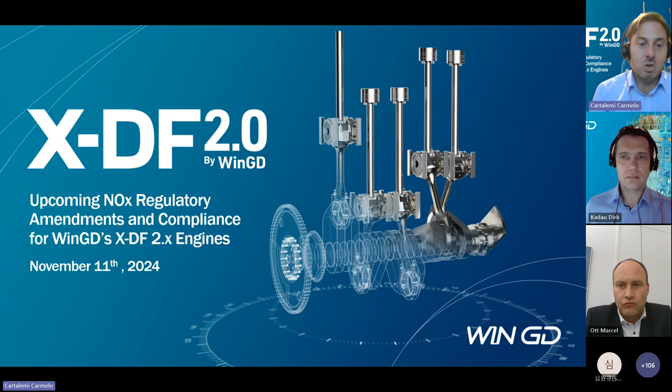A quick look at the agenda today. My name is Carmelo Cartalemi, I'm head of global sales, giving this introduction speech. Following me will be Dirk Kadau, our senior regulatory affairs expert, who will provide the overview of the revised NOx regulation. Then our Marcel Ott, general manager application engineering, will explain the iCER concept, the X-DF 2.0, what is unique about this technology, and show you our level of NOx emissions.

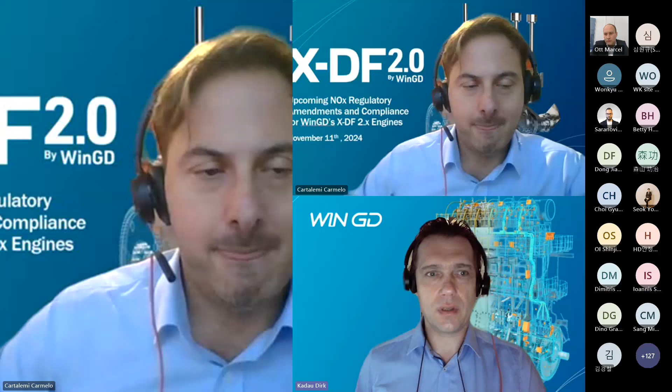Now I start sharing the presentation slides. So that should be the one, please complain if you cannot see them. These are my presentation slides. I will start giving you an overview about the revised regulation. So that is the brief overview of the contents.

I will start with a short overview and timeline of what was going on, then a summary of the main points of the regulation, then mentioning what is a rational versus an irrational emission control strategy, then introducing the concept of the not-to-exceed zone, and then the multi-engine operational profiles, ending with a short conclusion.

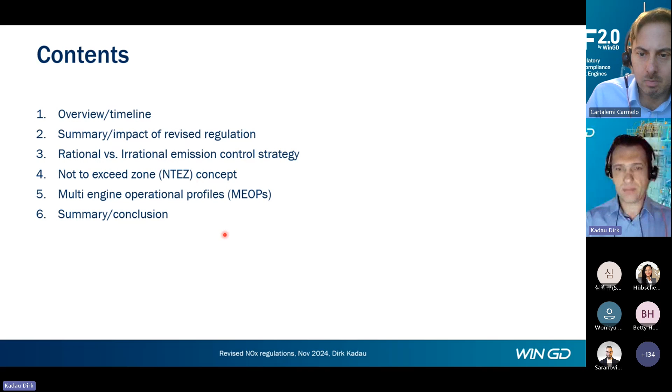That is an overview of what has happened in the past related to this topic. I will not go into detail on all aspects here, but mention only the main points. It started in 2016 with a submission by Norway related to multi-engine operational profiles, short MEOPs.

It was later extended to cover also the not-to-exceed zone concept. There were many discussions at IMO, mainly in the PPR subcommittee, and this ended with a common proposal by US, IMarEST, and Euromot, where all engine manufacturers and designers, as we are, participated as well.

That common agreement proposal was agreed at PPR in early 2024, and recently approved at MEPC. This was then released in an IMO circular where you can see all the details of the regulation. There are other additional information papers which I've listed here, in particular this webinar held in the context of PPR 11 by US, IMarEST and Euromot, which I will also use in my presentation with some illustrations from it.

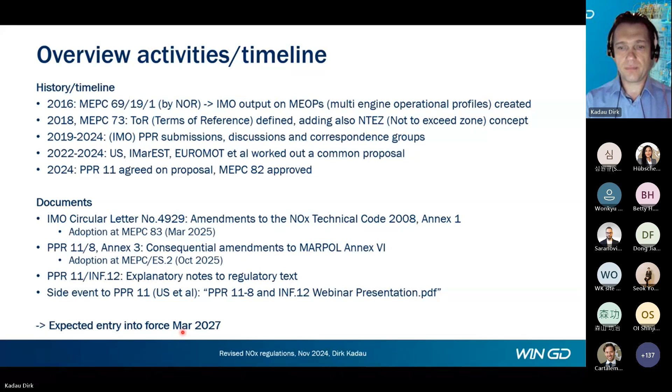And this will be entering into force in March 2027. So that is a brief summary of it.

First of all, I would like to highlight that these new requirements are rather clarifications of what is already considered to be existing regulations. So it will not change the stringency or lead to stricter rules than we have now. It's more a matter of clarification of existing rules, which you will see in the course of this presentation.

What will be added is some documentation effort, what is then called the NOx certification pack. There we will have to describe our base emission control strategy, then also the auxiliary control devices, which we already do now but will have to document in more detail, and there will be an extended definition of these ACDs such that we will have to declare additional ACDs. But that is what we are going to support, of course, our licensees and engine manufacturers in that regard.

What is important to note here is this discussion already in the existing regulation about a rational versus an irrational emission control strategy. You should have a rational emission control strategy, and you are not allowed to have a so-called irrational one. That applies already now, but it is not further specified in the current regulation what this means.

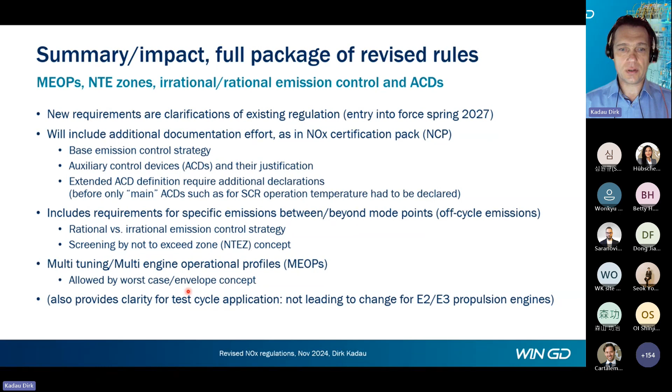In addition to that, there were also some modifications for test cycles, but these would not change the application for our engine categories. That is maybe the main point behind adding a more detailed screening option for the emission control strategy.

Here on the left, you can see an illustration of a rational emission control strategy. Just to mention, this illustration was specifically designed for a presentation by US and others, which was held for the IMO. Here you can see between the different four mode points, the speed and power plot, which is the one we all know is certified during a shop test, and in between or going beyond, it will react smoothly. That is what is called a rational emission control strategy.

Here, just to highlight again, that is not an existing engine, but just an illustration of how an irrational emission control strategy could look like. There would only be very low specific NOx emissions around the four mode points, and much higher emissions in the rest of the speed power plane. That would mean these four mode points would not be representative for the emission behavior of the engine. And that is not what it should be.

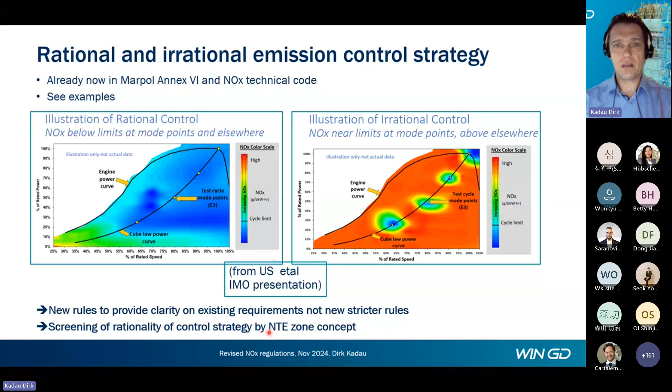What is important to know for this not to exceed zone is that it has to be specified. It will be specified by the applicant, typically the engine manufacturer, and of course supported by the engine designer in our case. It should cover all the steady state operation points within this zone.

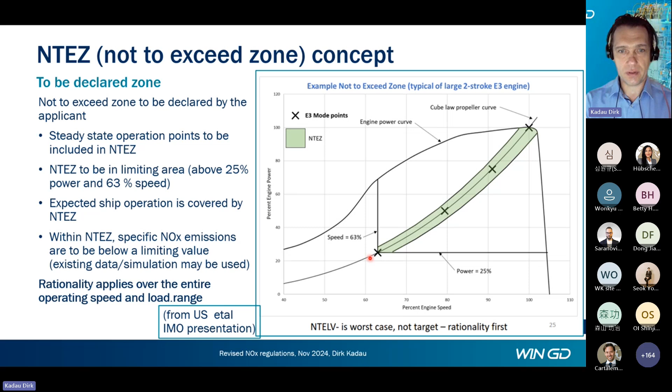What is maybe most important is now the criteria, the limiting values in there, and I will try to make this as short as possible. So on the mode line, you would apply a factor of 1.2 to the values you measured. And for tier 3, you would add 25% of the limit value to the value you measured on the mode line.

So that would be, in our case, 25% of 3.4 gram per kilowatt hour, meaning 0.85 gram per kilowatt hour. That would be on the mode line, which is illustrated here in this very thin line.

And then at the edge, that would be increased to a factor of 1.5, and you get an additional factor Fb, which accounts for the amount you are below the limit value, your cycle average below the limit value.

So assume for tier 3 you only have 1.7 gram per kilowatt hour, which is only half of the limiting value. That would grant you a factor of 2 here in addition to this 1.5. That is also illustrated here.

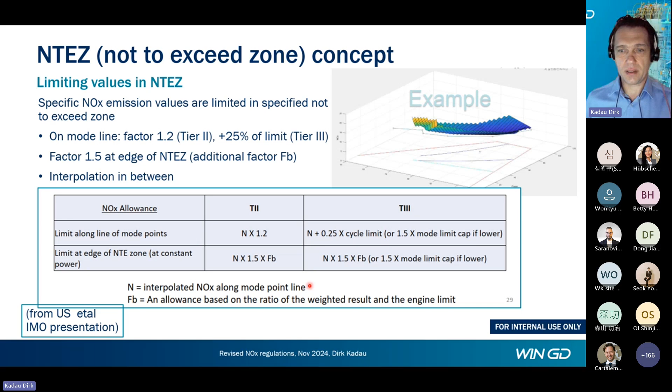And here, again, that is a summary of that one. Here, that is a bit more detail on how you would determine these values. So that is again the speed and power line.

Here you would have the mode points, and to determine the limiting value for this point, you would first have to interpolate your emission value measured at these two mode points. You would receive the value here, this N, what is called Ny.

That you would then multiply by the factor 1.2, or the other criterion for tier 3 accordingly, which gives you this NLY. That would be at this point the limiting value, and then you would have a limiting value specified by 1.5 times the value, which gives you the value here, and then you would interpolate between those two points.

And that would be then the limiting value at your checkpoint, which you would have to cope with.

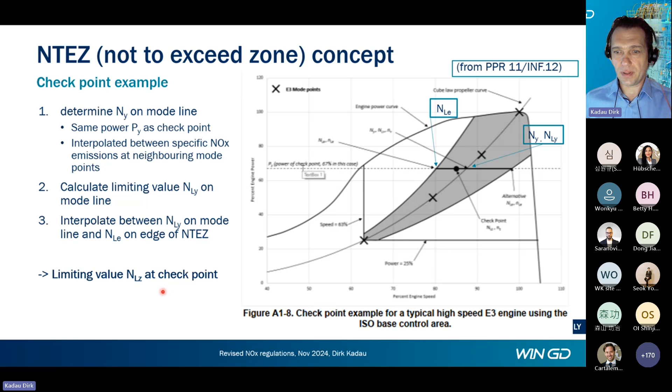In the new regulation, it is clearly regulated that you have to take the highest value of each, due to the reason that the operator can switch freely between these modes. In principle, if this were specified differently, he could use switching between the modes to circumvent being in line with the requirements of the NOx emission regulation. That is the reason why this is like this.

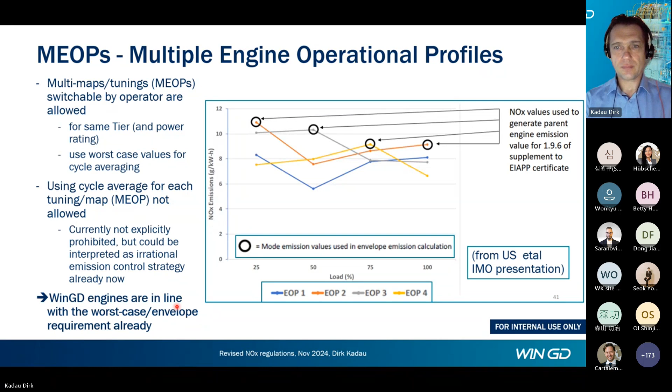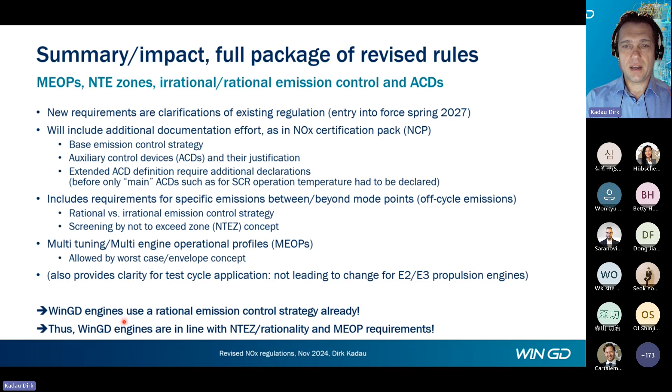I'm very happy to have this opportunity to present an update of the rules and regulations that Dirk just did, but we would also like to give you an example of how and why our XDF engines are and remain NOx compliant with any of the rules that have just been discussed.

First of all, regarding NOx compliance of our XDF engines in general. The situation now, as Carmelo has also mentioned at the beginning, is that the announcement of our competitor, particularly to remove the low pressure Otto cycle engine, the ME-GA, from their portfolio, has actually created some interpretations or perceptions in the market that Otto cycle engines would in fact not be compliant with the updated NOx regulations. The rules and regulation changes we have seen from Dirk before - we would like to give you some of the fundamental insights and basics here.

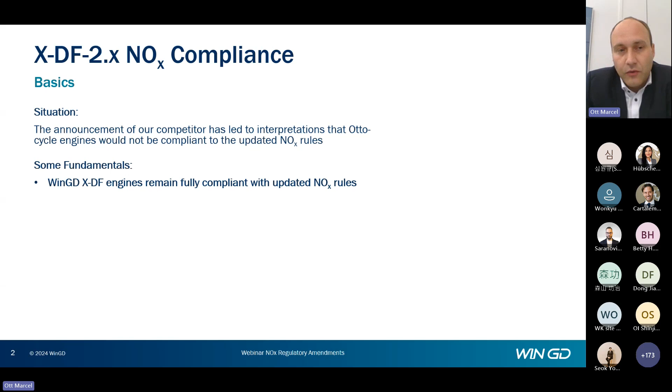First of all, confirm very clearly that our XDF engines remain fully compliant with the NOx rules and all the changes or updates that are to be expected now.

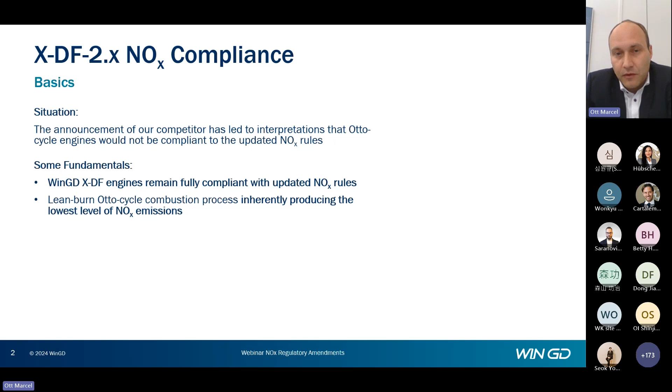Secondly, we can also state it's fair to say that the lean burn Otto cycle combustion process is in fact by nature the process that produces the least possible NOx emissions. So if you talk about a low NOx or the lowest possible NOx engine, it's actually a lean burn cycle combustion, which as you can see from the illustration here, typically produces about 30 times lower NOx emissions compared to any diesel cycle combustion engine.

That can be a diesel engine, or it can be a high pressure dual fuel or natural gas engine that works according to the diesel principle. But what they have in common is that diesel cycle engines always have a NOx-BSFC trade-off, which means that the higher the NOx, the better the BSFC, and vice versa. That is one of the fundamental reasons why they're typically also tuned to be close to the NOx limit, which in that case is Tier 2.

You see that the IMO limit there is 14.4 grams, so engines are typically close to that. While you see the example of our XDF 2.X engine here, that typically has NOx emissions of 0.5 grams per kilowatt hour or below, which is far below the regulatory limit, and which, as I mentioned, is about 30 times lower than a diesel cycle engine.

So just very generally, to assume that the upcoming regulations would try to somehow penalize the best-in-class engines, I think that is somehow strange, and it's clearly not the case.

A number of parameters are impacting NOx emission or NOx formation of the lean burn engines, and this is only a list of a few of them, some of the most important. Engine tuning, of course, impacts NOx emissions, and that's also the reason why these kind of screening principles have been or are going to be introduced now, to make sure that the tunings are rational also in between the IMO load points that are measured.

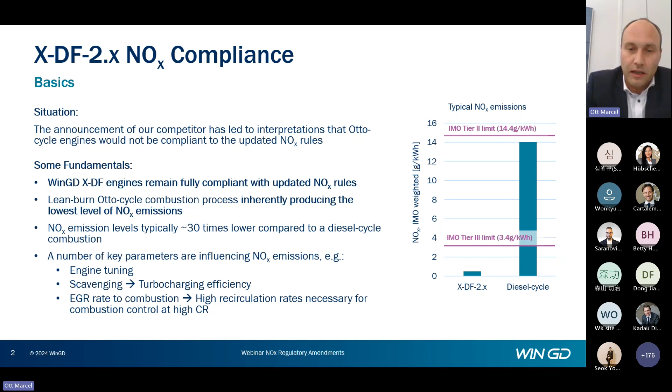Another very important factor on the latest generation engines with exhaust gas recirculation systems is the amount of exhaust gas that is fed back to the combustion - the EGR rate, as we call it. So how much of the exhaust gas is fed back into the engine again. We see that high EGR rates are necessary for good combustion control when running on gas on an engine with a high compression ratio. That is a fact we would like to highlight and explain in more detail.

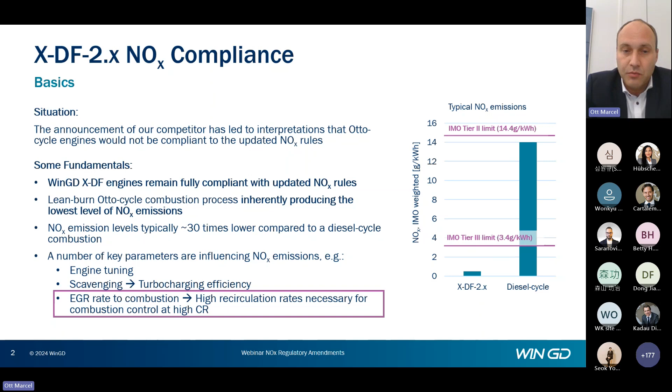In fact, this is also one of the areas where we do have a conceptual difference to our competitor's product, that clearly plays in our favor in this case. So let's have a look at a few of the fundamentals of the different EGR systems that are applied on our engine and on the competitor's ME-GA engine.

I think it becomes clear here that there is a conceptual advantage of our ICER system, as we call it, our low pressure EGR system, versus the high pressure EGR system that our competitor applies. To the left here in the illustration, you see an overview of the ICER system layout, and you can see that we take some exhaust gas after the turbocharger turbine and feed it back through this recirculation loop into the engine. That means there is always the full exhaust gas flow across the turbocharger turbine, regardless of how much exhaust gas you recirculate, and that ensures the highest turbocharging efficiency in all modes, in gas mode, diesel mode, but also if the ICER system is switched off.

The system also allows us to run very high EGR rates, so we're using something around 50% of the exhaust gas flow on a regular ICER engine. On engines with ICER and VCR, our latest specification, we use up to 65% of the flow that is being recirculated. And that, as we have seen from test results and simulations, clearly leads to the best possible performance and efficiency, because it allows us to maximize the compression ratio and achieve the best results.

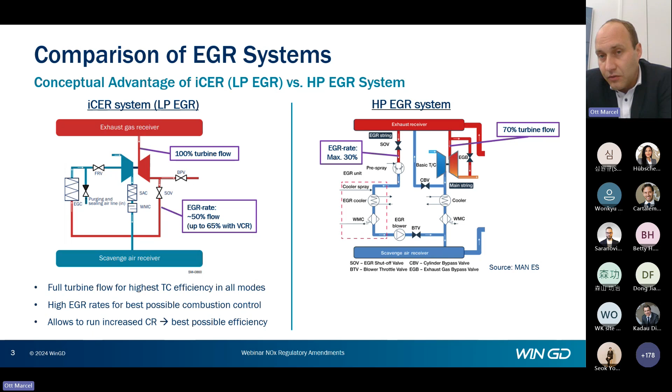As you start to recirculate exhaust gas through the EGR line, the flow on the turbine is reduced, and the power on the turbine is also compromised. That leads to compromised scavenging, and that's one of the major fundamental disadvantages of this system.

Furthermore, this limits the EGR rate to approximately a maximum of 30%, which, as I just mentioned, is seen as insufficient to run on a reasonably high compression ratio and achieve competitive performance figures. In case you want to run on a high compression ratio anyhow, combustion stability would become an issue because of the lack of EGR rate. That in turn requires injecting some diesel to stabilize combustion in all operating regimes, and injecting an increased amount of diesel will have an impact on NOx emissions.

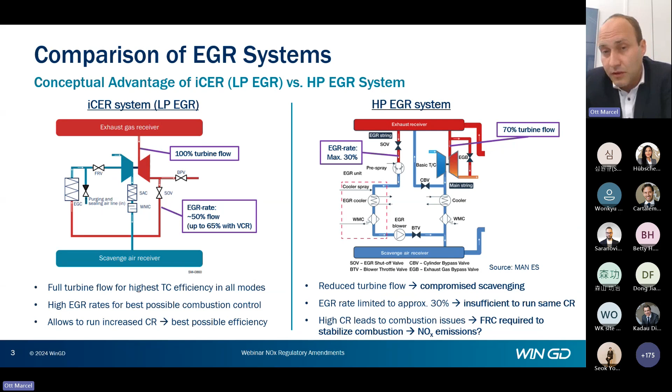We don't want to speculate here how this affects the compliance and competitiveness of our competitor's product. But this is just to show the conceptual differences between the two engine types and a possible explanation for why we believe our XDF engine has conceptual advantages to be compliant.

We would also like to give you a few examples of actual NOx measurements of actual engine series, production engines, and explain why they're compliant with the new upcoming rules.

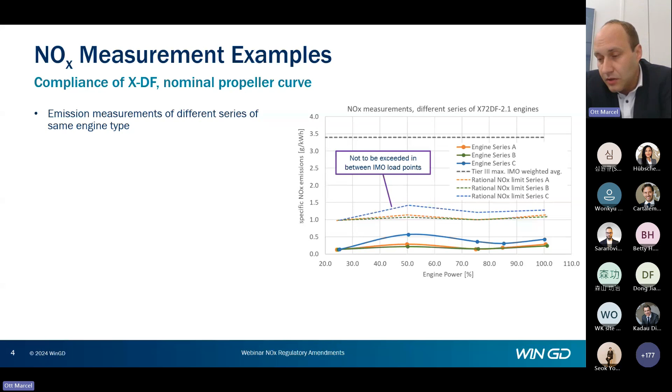What you see in this graph is NOx measurements on some of the load points of 3 different engine series of the same type. They're all X72DF 2.1 engines, but built at different manufacturers, so different test beds with different measurement equipment, obviously different testing conditions, ambient conditions, gas qualities, and so on. You see that NOx emissions vary to a certain extent between the 3 full lines at the bottom, because the engines have different ratings, different ambient conditions, different test beds, different measurement equipment, and gas qualities differ between them.

But what you can also see is that the level of certified emissions, the IMO average levels, are significantly below the tier 3 NOx limit. The tier 3 NOx limit is at 3.4 grams, shown by that dashed line at the top, while the engines are certified with NOx emissions of 0.2 to 0.4 grams in this case. So very much below the NOx limits overall.

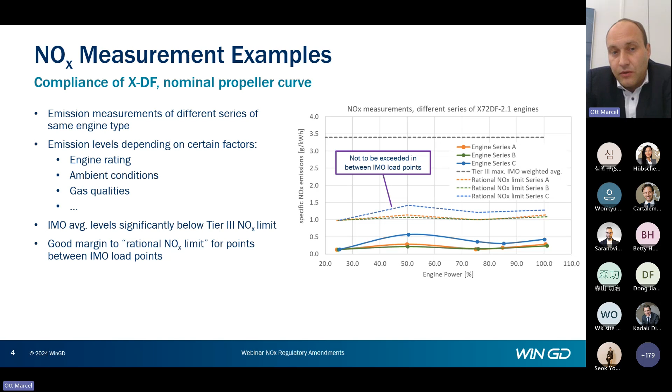What we also see is that we have a good margin to what we call the rational NOx limit for points between the IMO load points. The dashed curves drawn on top of the measurement lines indicate the maximum level of NOx emissions allowed in between the IMO load points to still be considered as rational control. As long as any additional measurements in between load points are below that limit, the control strategy is considered rational. You see we have a very good margin to that. There is actually no reason why we would have to exceed this rational NOx limit for any reason.

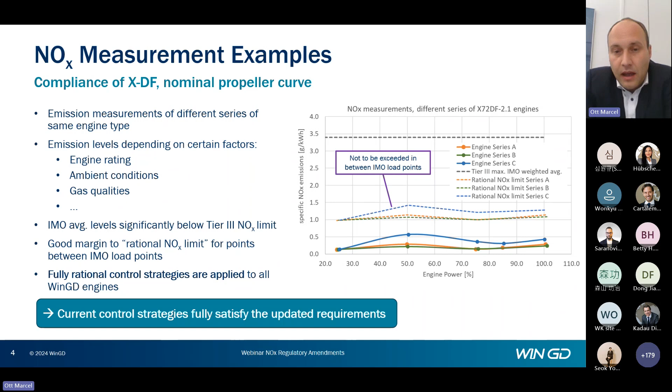We have applied fully rational control strategies on all our WinGD engines. That's a general principle you can count on. With this, we can confirm that even the current control strategies, what we have now and what we had applied in the past, is fully satisfying the updating regulatory requirements.

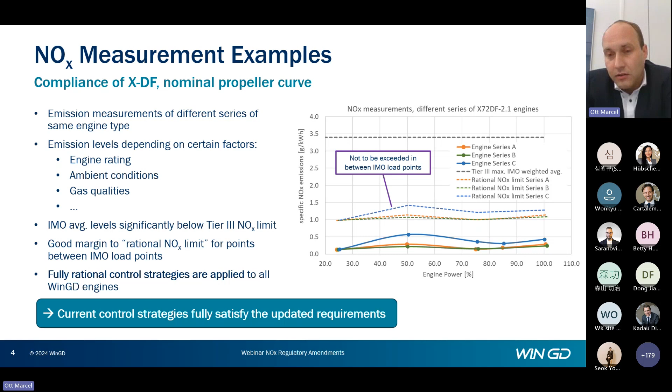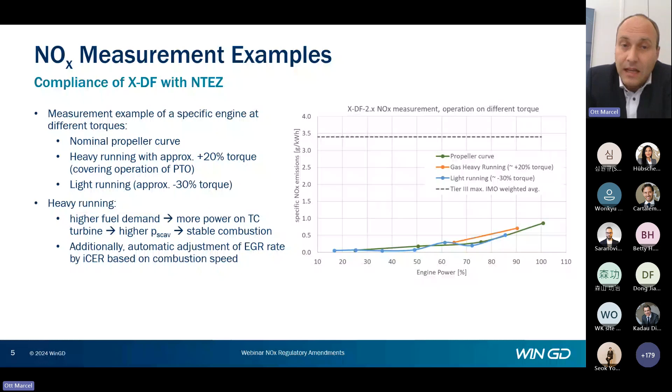What happens is when you run with higher torque, with PTO for example, the fuel demand increases. We get more exhaust gas power to the turbocharger turbine, which leads to a higher scavenge pressure. And the higher scavenge pressure, again, stabilizes combustion, allows to run with the best possible air-fuel ratio. For this, you need to have high turbocharging efficiency, and you want to have the full exhaust gas flow on the turbocharger, so don't waste it by bypassing the exhaust gas from the turbine. That's naturally, again, an advantage of our iCER system.

Additionally, what the iCER system does is that it also continuously monitors the combustion speed, the actual combustion of the engine, and it adjusts the EGR rate based on that. So if it sees that the combustion starts to deviate from what it should be, it starts to adjust the EGR rate, and by that it also stabilizes the emission behavior of the engine.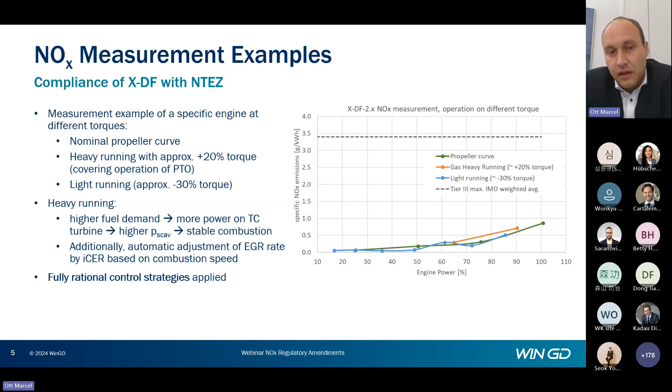So even if we have varying torque operation, the NOx emissions are not affected to a great extent and remain fully compliant with the limits. Again, to outline here that we do always use fully rational control strategies. And as you see from this example, the engine remains fully compliant with the rules and regulation, also when operating besides the nominal propeller curve.

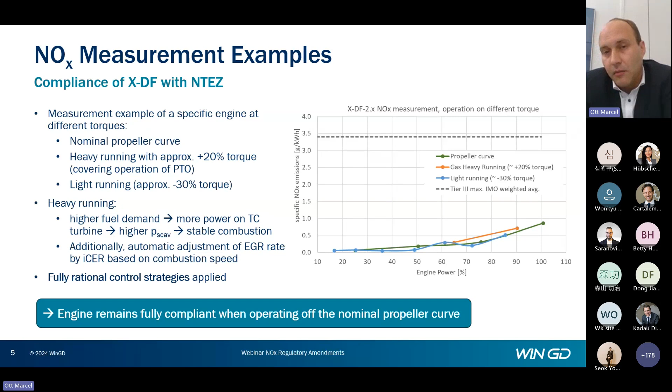A few more words here on the general competitiveness of the VCR or the XDF engines, and I'd also like to spend a couple of minutes explaining some of the newest or latest steps we made with our VCR, variable compression ratio system.

As we were talking about the engine tunings and other aspects, I think this is also worth mentioning because the VCR provides an additional dimension in how we can tune the engines to achieve best possible efficiency and emission levels throughout different ways of operating the engine.

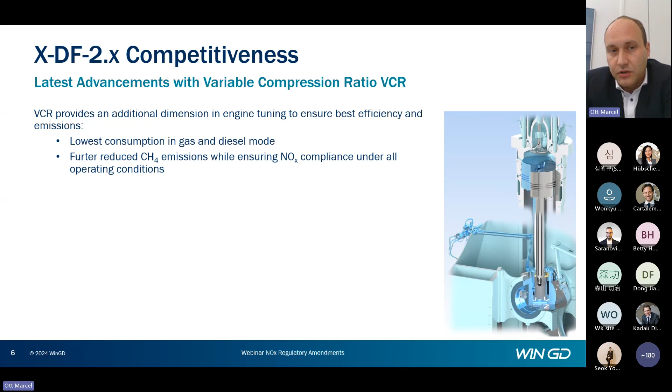This VCR system, which I think many of you are aware of, leads to further reduction in gas and diesel mode consumption, and it further reduces methane slip, while NOx emissions can be fully under control under all operating conditions.

Here is an example of a comparison to the ME-GA figures. Obviously that's not so relevant anymore, but we have been asked by many customers how we look in that respect in comparison.

As you can see from these graphs, to the left is gas consumption, to the right is diesel consumption, specific consumptions. This engine, latest specification with iCER and VCR, results in about 6.5 grams or 5% lower gas consumption compared to what the ME-GA used to have specified.

In diesel mode, the advantage is even bigger. There it's 8%, or 13 grams lower consumption. So it's a massive step in comparison and a significant improvement in efficiency.

And that also obviously turns into CO2, lower CO2 emissions. With this, we are actually outperforming all other propulsion system types, also including high-pressure dual-fuel engines.

Specifically when looking at LNG carrier applications, I think none of the systems that are available or being discussed provide similar or comparable efficiencies to what we have with this released product here.

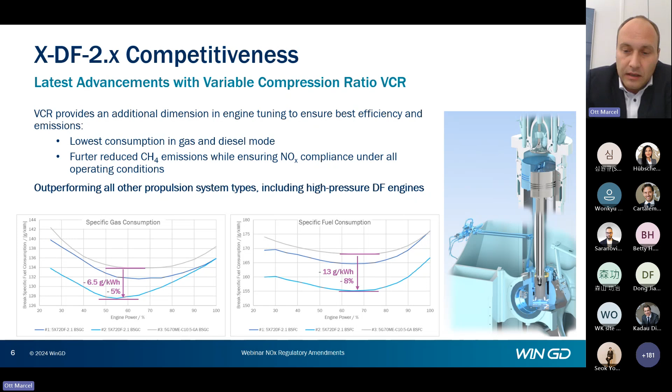This also brings me to my conclusion slide of this second part, and I would like to reinforce that our XDF engines are fully compliant with the upcoming rules, and that there is no reason to worry about that.

As we have seen from Dirk's part of the presentation, the update of the NOx regulations is actually mostly related to methods for screening against irrational controls. So it is a measure to have a possibility to find irrational tunings or controls on engines.

And as our engines have always been tuned according to rational control strategies, this does not impose any direct consequences to our engines. So there are no additional limitations or need for adjustments of tunings or any hardware settings on our engines. And also fuel consumption is not affected.

We often get the question now, how does that influence fuel consumption? But since the tunings do not change, we have had these tuning strategies already before, so there is actually no impact on fuel consumption resulting from this update of the rules.

Our engines, as we saw, remain fully, let's say, the best, most competitive solutions with the best performance and emission footprint. Overall, we're very confident and proud of the latest steps we have made there, also when it comes to the VCR system, which further improves performance advantages over any other alternative systems or engine types.

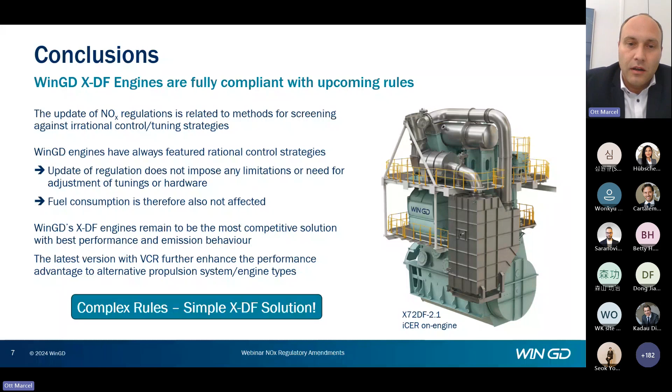So with that, we come to the end of this second part of the presentation, and I would like to hand back to Carmelo to moderate the Q&A session. I hope we have received a number of good questions in the chat box.

Indeed, we received many interesting questions. First of all, thank you, Marcel and Dirk. Excellent presentation, very clear. Let's get started.

The first question we received is about the retroactivity of this regulation. So, what if an engine is tuned with an irrational control strategy, as shown in the right graph that Dirk showed before? What will be the consequences, especially for the existing fleet?

I don't know if you can, Marcel, want to take this? I think on the regulatory aspect, I would leave it then to Dirk to say something about that.

I think when it comes to our engines and our products, there is no such case, because the engines have always been tuned according to rational control strategies. So there are no such engines in the field that would not be compliant here. When it comes to our competitors' engines, we don't know - of course, the question would need to be asked to our competitor. From the rules and regulations side, I'm not sure if Dirk has an opinion on whether this will have any impact.